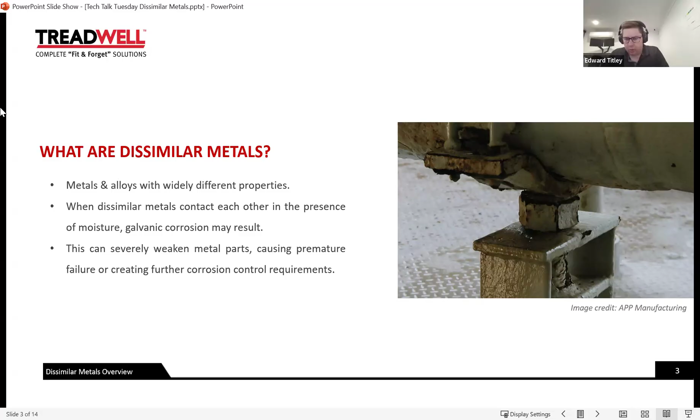So, types of dissimilar metals risks. Firstly, is galvanic corrosion, as we've mentioned. When dissimilar metals come into contact in the presence of an electrolyte like moisture in the air, or salt water, which is even worse, or some other substances, they can effectively create a small electrical circuit which leads to galvanic corrosion, which is typically accelerated over corrosion that we would normally see for something just in normal use.

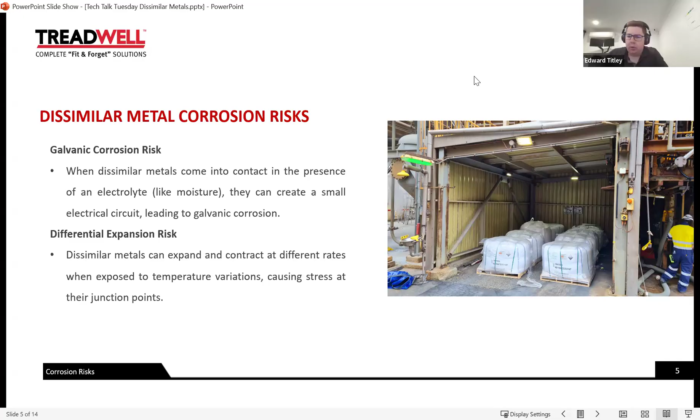The other potential concern is differential expansion risk, where dissimilar metals potentially expand and contract at different rates, which can cause some challenges or concerns around connections where they're connected to one another. But really, mainly what we're focusing on today is the galvanic corrosion aspect.

So where might we see these crevice corrosions? So tight spaces or gaps between dissimilar metals might be a flange and a blank plate on a pipe, or a flange made of one material and a pipe made of another material. It could be a stainless fixing into a mild steel structure. It could be an aluminium handrail on a mild steel structure. There's a variety of places where we often run into these situations and potentially overlook the concern that we might cause ourselves down the track.

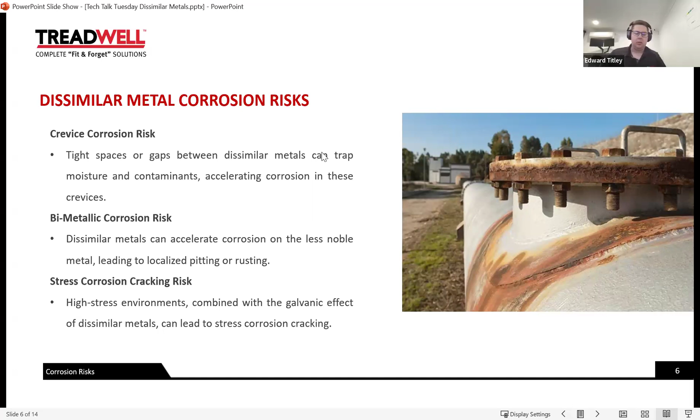So we'll see accelerated corrosion, which obviously is not good from a maintenance perspective, but it's also not good from a structural perspective. You don't want to see stress corrosion cracking or something like that.

So why are we worried about this? Firstly, is the maintenance aspect. Obviously, here at Treadwell, we're interested in low maintenance structures. I won't say no maintenance because I don't think any structure exists that's zero maintenance, but low maintenance structures. If we've got galvanic corrosion: regular inspections, cleaning, recoating, cathodic protection. Sometimes we might have isolation coatings or rubber isolator packers or washers or something like that. We need to inspect and make sure they're still present, not in any way deteriorated or perished or decayed, and then the associated cost to fix that.

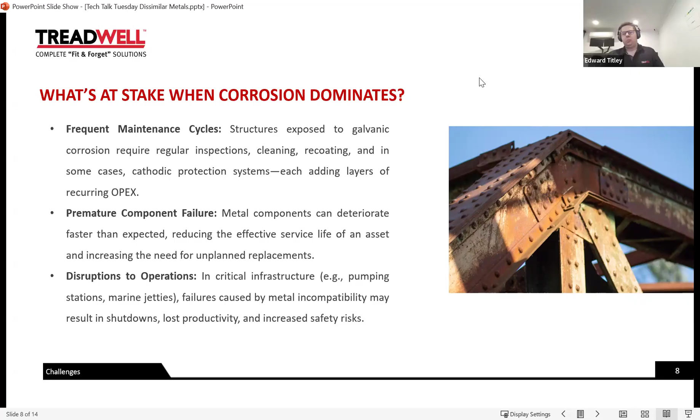Premature failure is another part of that, if we're not getting the service life that we want to get out of things. But then also disruption to operations. If we've got a processing plant or a sewage treatment plant or something like that that's out of service, that's obviously problematic as well. So we want to reduce the maintenance we have to do on any structure, whether it's FRP. I mean, obviously, we've got a bit of a bias towards that, as you might imagine, but any structure really.

Now, high risk environments, especially salt water, seem to accelerate galvanic corrosion. I guess salt water is a better electrolyte.

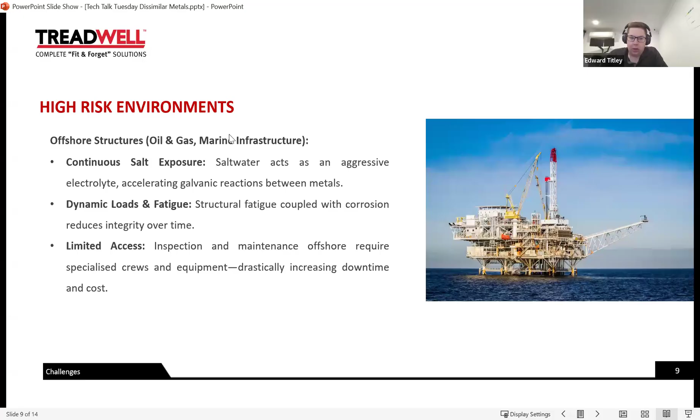Often we'd associate that with maritime, offshore, jetties, wharves, those sort of things, but also a lot of mineral processing; a lot of the water used is very saline. So that's another area where we see accelerated galvanic corrosion. One thing I also want to point out is a lot of these areas have limited access. So scaffolding costs, EWP costs, rope access. It's all an unnecessary expense.

Same with water and wastewater treatment: hydrogen sulfide, chlorine treatment chemicals, typically high humidity, constant exposure to moisture and so on, and multiple metal types. We've mentioned some of these situations where we might see these. Often we see a mild steel structure with a coating, which is fine. We might try and put an aluminium handrail on it. We might hang a stainless steel cable ladder from it. All these interfaces are potential starting points, I guess, for corrosion from a galvanic corrosion perspective.

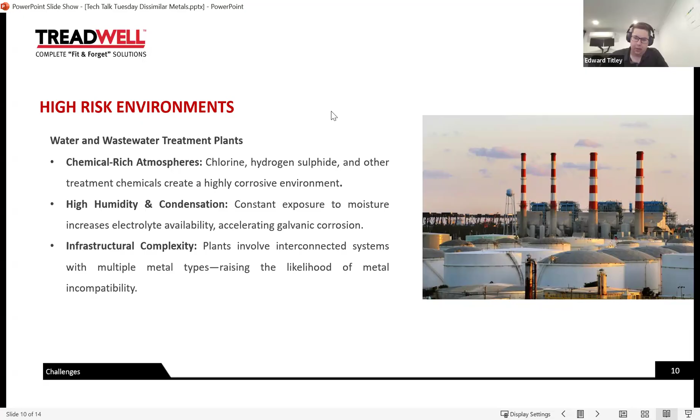So how or why does FRP help? Most commonly used, we've touched on, is an isolation, so a physical barrier between parts. That might be rubber packers, it might be nylon or rubber washers, it might be a coating to try and keep those parts separated, or it might be corrosion control measures, blast and paint. It could be a cathodic protection system. There's a variety of ways it can be done.

How or why does FRP help? FRP is obviously non-conductive. So we've mentioned a mild steel structure with the stainless cable ladder, stainless handrail, aluminium handrail. The question this brings is, where do we do the isolation? This is often a discussion we have. If I've got a mild steel structure, you can imagine I want to hang a stainless cable ladder from it. Where do I do the isolation?

If I've got a mild steel structure that's epoxy coated, do I do stainless threaded rod or a trapeze type bracket to hang it from, and thereby have to isolate the stainless threaded rod, say, from the mild steel structure? Do I do a galvanized threaded rod, which may not have the durability of the epoxy coated structure, and then isolate on the cable ladder? So there's a lot of considerations.

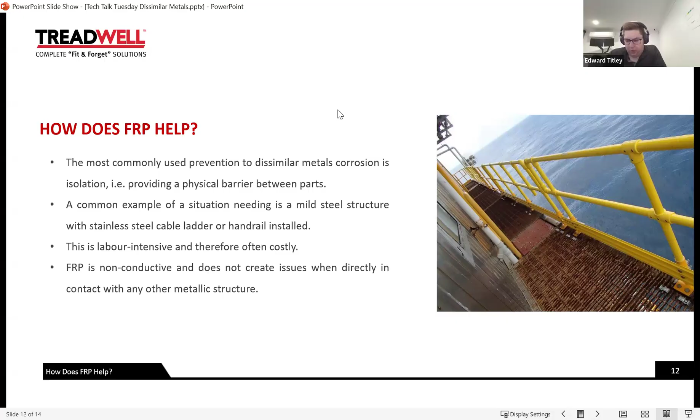If we go FRP, and obviously FRP is not right for everything, but if we go FRP for, say, the handrail or the cable tray or the floor grating, FRP is non-conductive, so we don't have to deal with that isolation issue, which simplifies install but also reduces your maintenance long term.

Now, hopefully we can run nice and quickly for this and be finished ahead of time, since we've run over time for the last few sessions.

Another area of concern that we've identified is grating or decking fixings, flooring fixings. Now, as we mentioned before, we've often got a mild steel structure that's got a coating system on it. If we use a self-drilling or self-tapping screw, obviously we're damaging that coating. It's very unlikely we'll be able to remediate that effectively on site within the confines of time and physical constraints, like lack of ability to blast and paint. We try and use a cold gal or something like that. So it's unlikely we'll get that coating reinstated to a satisfactory level in any case, or a bolt and nut.

If we have the level of detail for floor grating before the structure is built, holes can be pre-drilled and then present when the coating's applied, whether it's hot dipped, whether it's a duplex system, whether it's got an epoxy or a paint spec on it. But often that flexibility from a timing perspective is not workable.

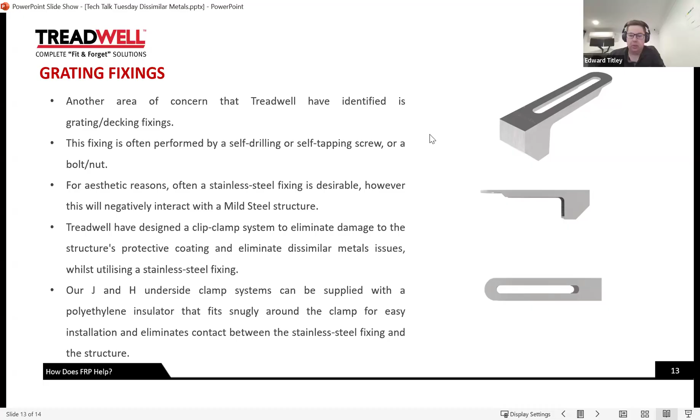That draws us to an end. Trust it's been a worthwhile discussion.